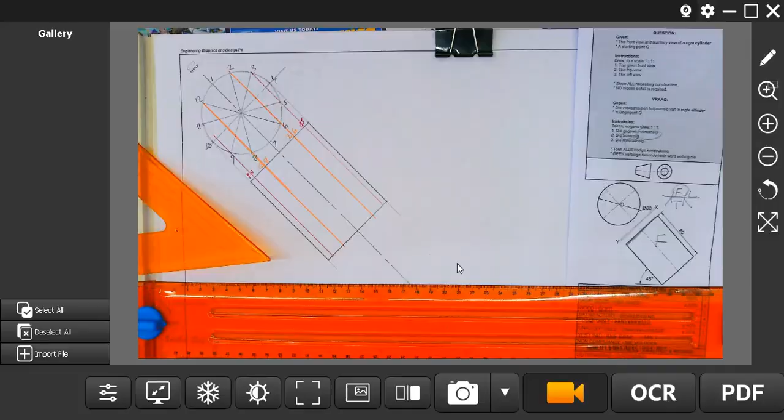But actually these videos are more for educational purposes for you guys. But I mean, it's an added bonus if it can help you to cover a few holes. Okay, so right, let's quickly look at this thing.

So I have got a front view. I have got an auxiliary view.

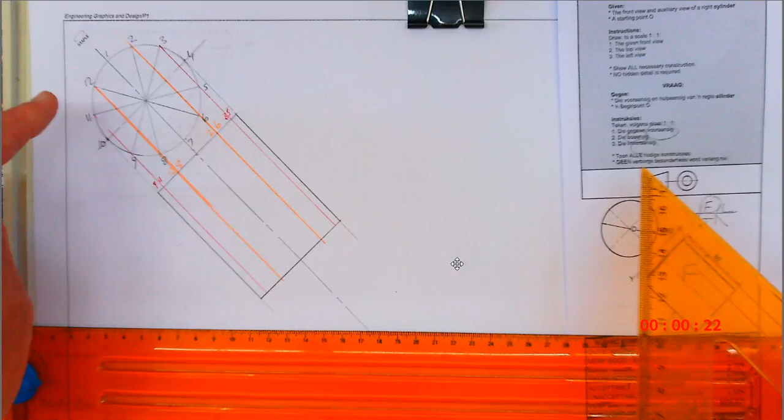This is an auxiliary view. What is this? Guys, it's very simple. If this was my pipe, then this is it. Now we're going to turn it upright. You can also use your Prit. We're going to draw this view. We're going to look from the left. We're going to draw that view there as well.

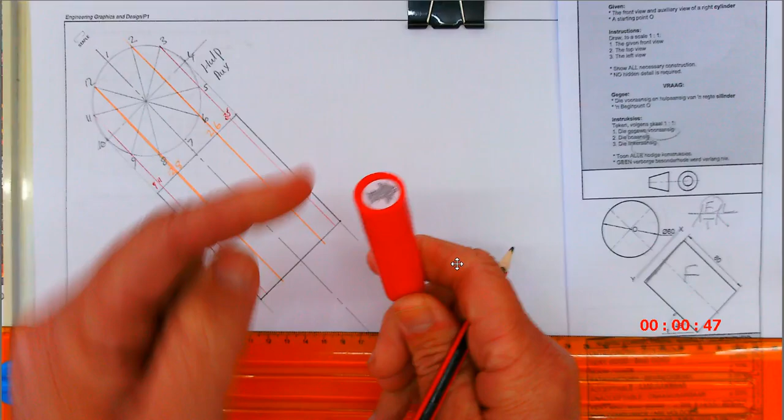Okay. So what I'm going to do is I'm going to put an XY line in between these two views. Anywhere in between them, you put an XY line at 45 degrees. There. Now, anywhere over here, we know this is a front view, so I need to put an XY line down here. Now, wherever you want to put that, over here is fine. So there, I'm going to call it X1, Y1.

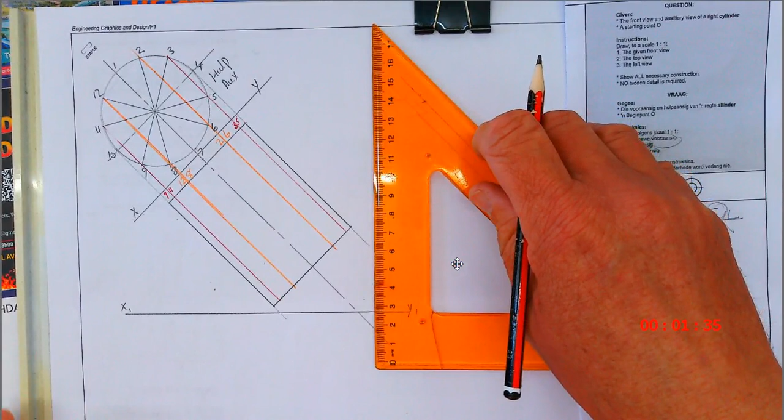Going to put another line here, and I'm also obviously going to do a top view and a left view. So I am going to move my ruler down, and I'm going to put my triangle, so that you guys can just see it. I'm going to put it over here. And I'm going to draw an XY line down here as well. I'm going to call this X2, Y2. And you can even take this a little bit further down.

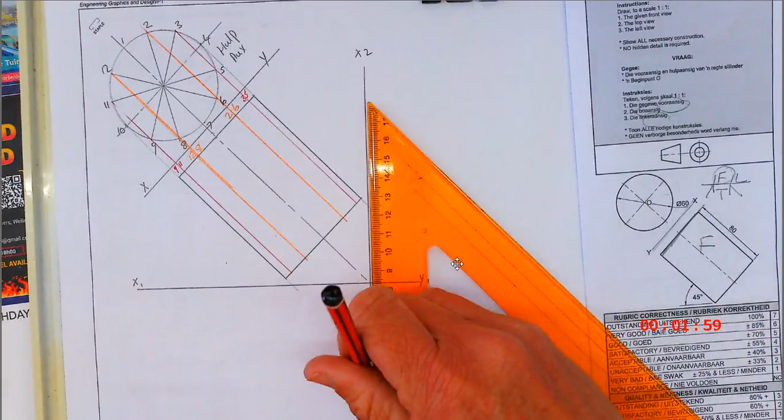As jy 'n 45 grade projeksielyn wil gebruik, if you want to use a 45 degree projection line, that would be it down here. You don't have to use it, but you can if you want to. Okay, once you guys have got this, I'm just going to cover up that part because this is a different page we are using.

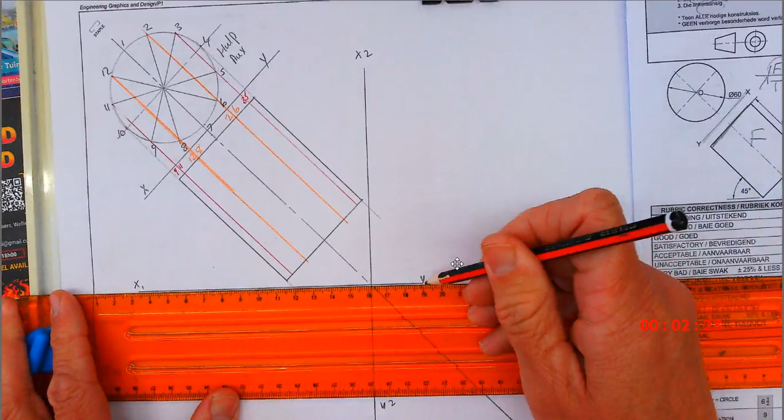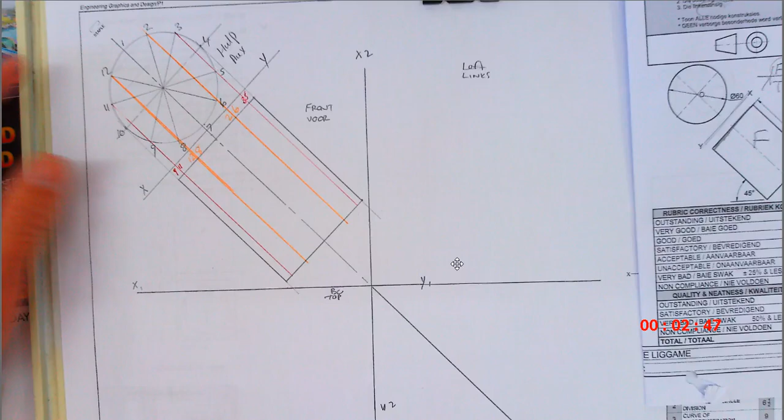So this is going to be our front view. Voor. Hierdie gaan wees ons bo-aansig. This is going to be our top view. This is going to be our left view, of ons linker aansig. Links, there's my 45 degree projection line. Okay guys, quickly, what are we going to do? Let me show you.

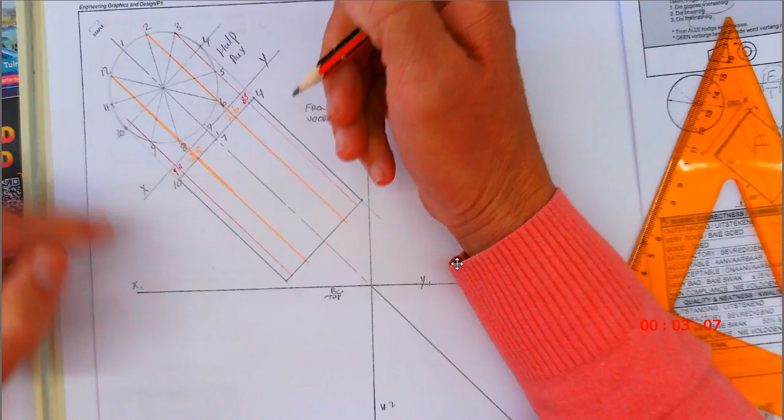Okay, you guys are going to have the top and the bottom points. I'm going to number them the same. This is 10. There's 4. The middle is 1 and 7. I'm going to have the same here, 10, 4. I'm going to have 9 and 11 on this line. I'm going to have 3 and 5 on that line. Do you guys understand why I'm using the colors?

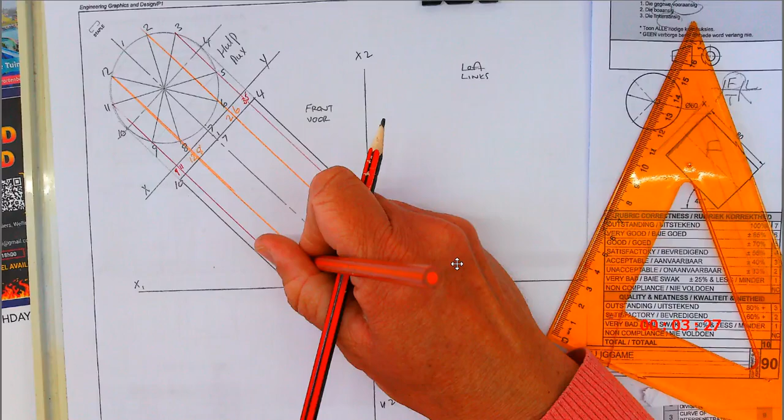Okay, het gaan dit 'n bietjie makliker maak vir jou. It's going to make it a little bit more logical. 12 en 8, 2 en 6 daarso. Wat ek nou gaan doen is, I'm simply going to go and I'm going to project these lines down. So I'm going to take this line down. I'm going to take that one down.

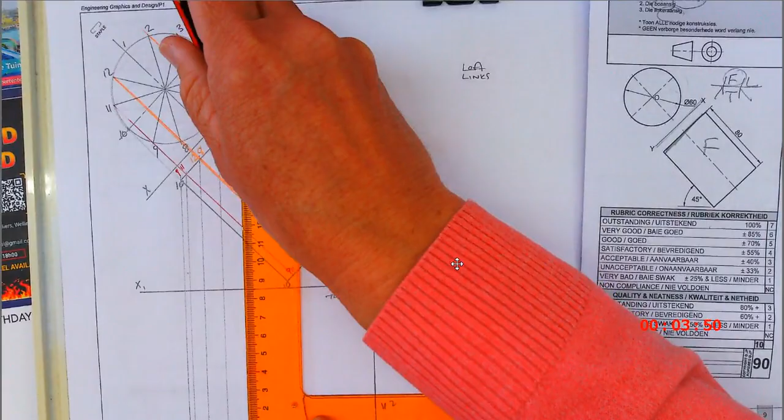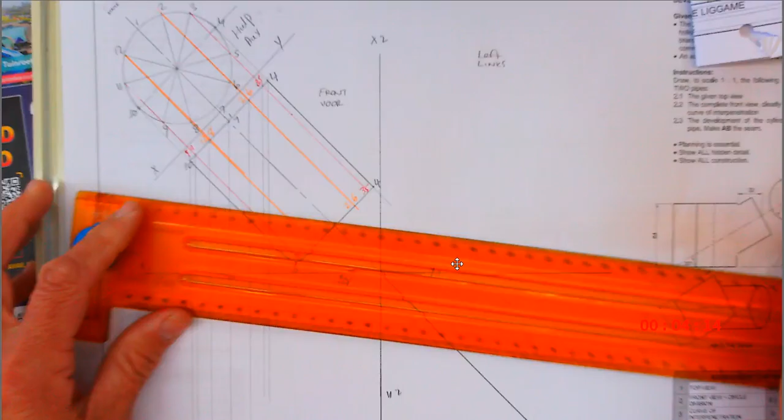And I want to give you guys a little tip that I think might be of value to you. Okay, my tip is die volgende, nee. I'm not going to do the whole thing. You can do it. Sometimes these lines overlap with those lines and then it becomes very, very confusing. So what I'm going to do is I'm just simply going to draw lines across here. I'm going to project these lines across, make sure that they are accurate.

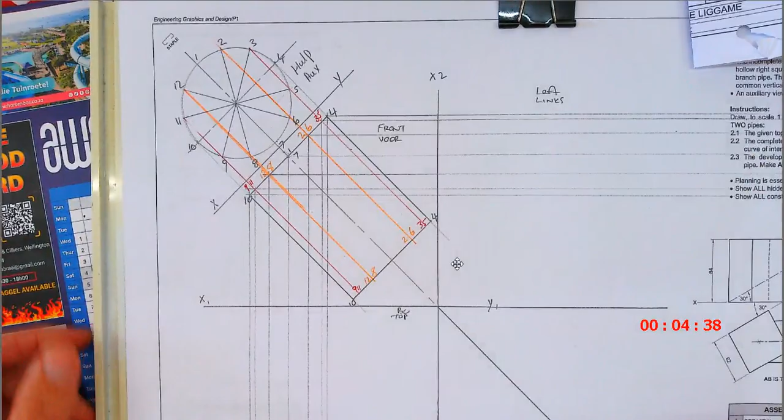Gaan hulle almal oor projekteer. I'm only doing the top. You guys will see these two are exactly the same. Okay, now it's just a case of numbering and measuring.

Okay, now can I quickly borrow that compass of yours? Thanks man, appreciate it, Matteo.

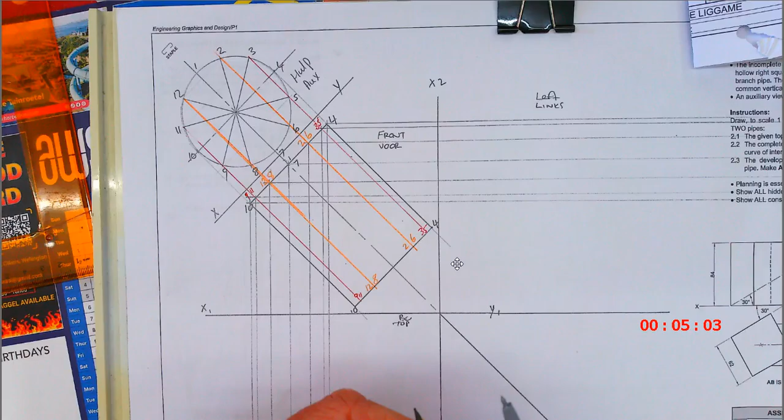Okay, so guys, what I'm simply going to do, no, it's fine. I'm going to transfer these points over. And if you guys are using a compass, make sure that it's nice and firm. Right, so what I'm going to do is, from the XY line, I'm going to measure.

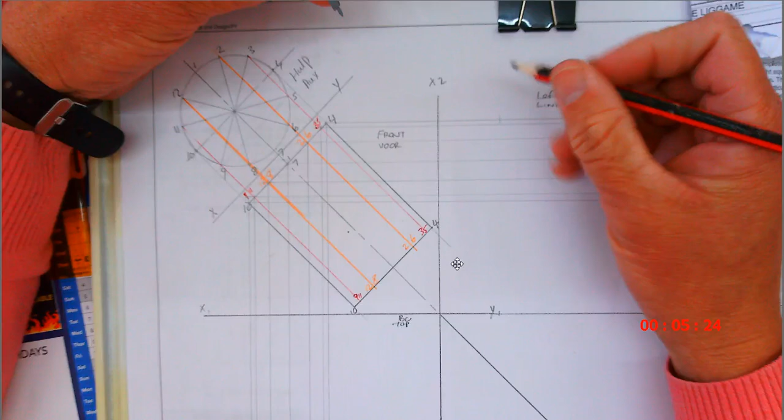There's the distance for 4. Guys, which ones are the same? 4 and 10. So I measure it once. I carry it over this 4, I carry it over to this one. As I carry it over, I number it as 4. 10 is going to be the same, so I'm just going to put it there, and I'm going to number it there as 10.

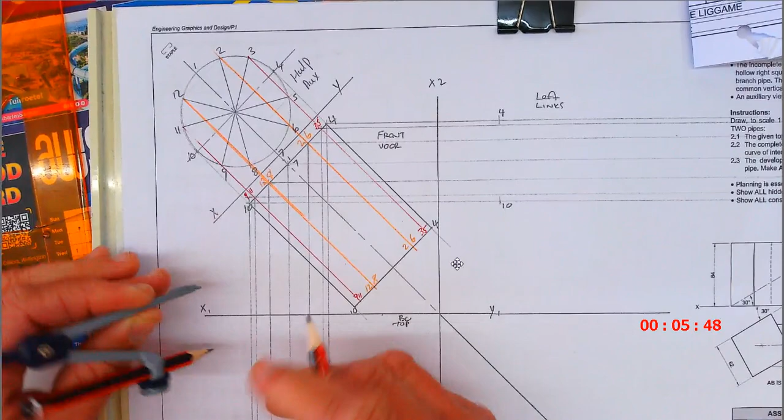Now if you guys have done it here, do the same thing here. Then it saves you some time. So there's 10, same distance. I'm going to put it there. So this is what you guys have been doing all along. So punt, grondlyn, punt, grondlyn, punt. So you measure there, kyk gou weer.

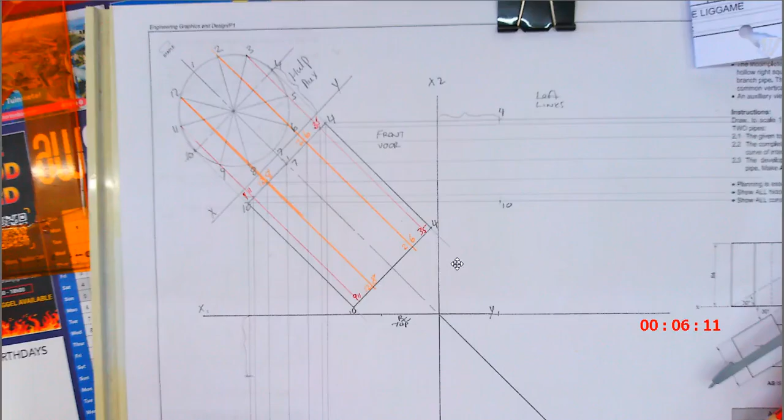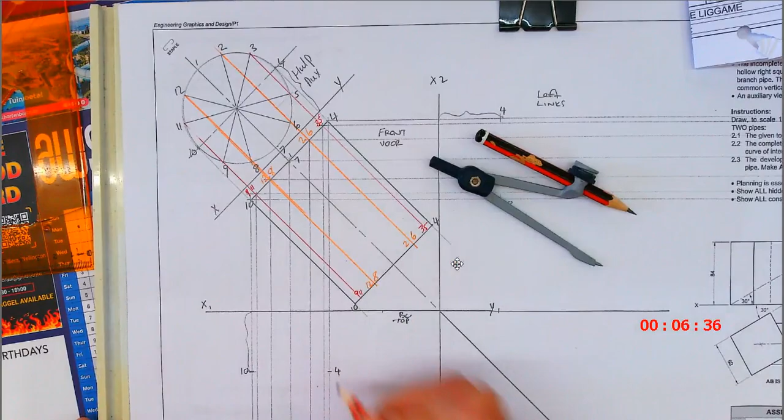Now I'm going to give you guys a shortcut. I like a shortcut sometimes. Okay? The shortcut is going to be the following. As you guys have measured 10, now 4 is the same distance. You can simply take your ruler and, if that is accurate, you just take this over and mark it there. That's going to be 4. If you guys would have projected it up, that is exactly what you would have had.

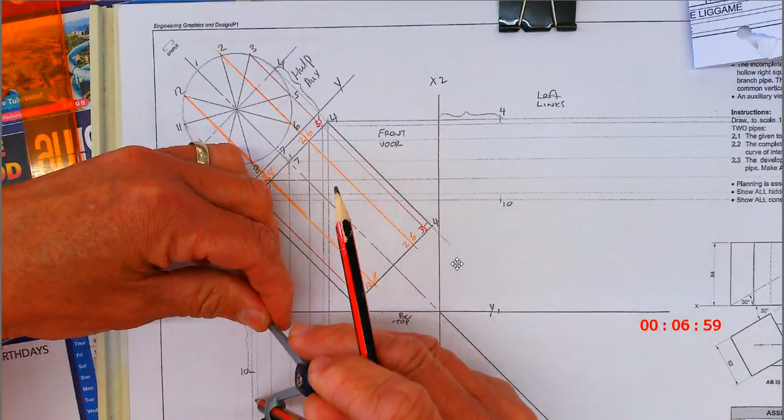Okay, so I'm going to do now the next 2 points. I'm going to take 3 and 5, the ones in red. So I'm going to take 3 and 11 actually, 3 and 11. So I go to point 11, I go down, I put it in here. I'm going to have another one on 3, on that line. So this one is 3. How do I know? That is point 3. There's point 11. I'm going to do the same thing here.

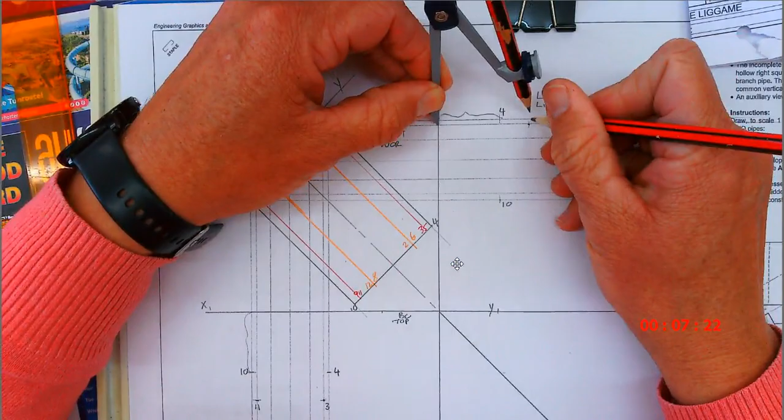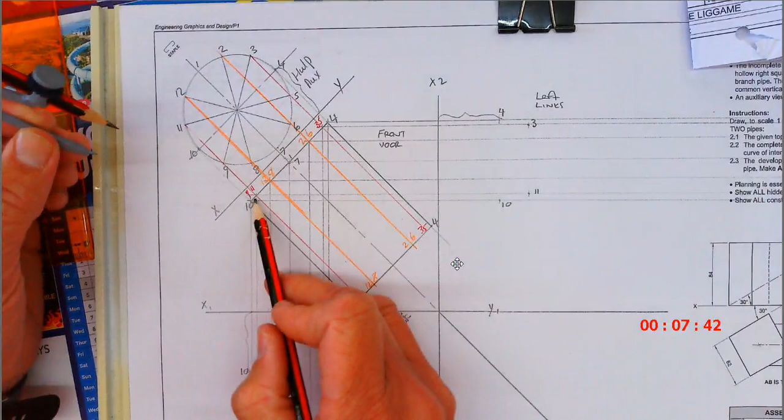And guys, now you just carry on with this until you've covered all the points. This is 3. And 11 is going to be in line with point 11 there. Okay, you guys can now just carry on with this and plot all your points. So this is going to be 11. Alright, now you're going to do 9. So 9 is going to be here. So where's point 9? There's point 9. So I just go across. Also is 9. There's point 9.

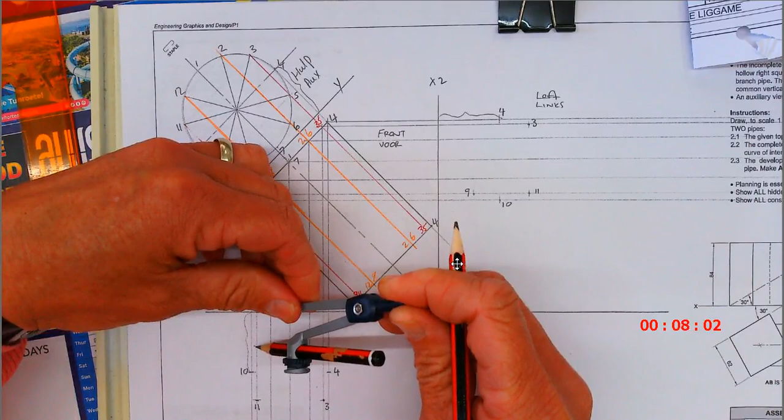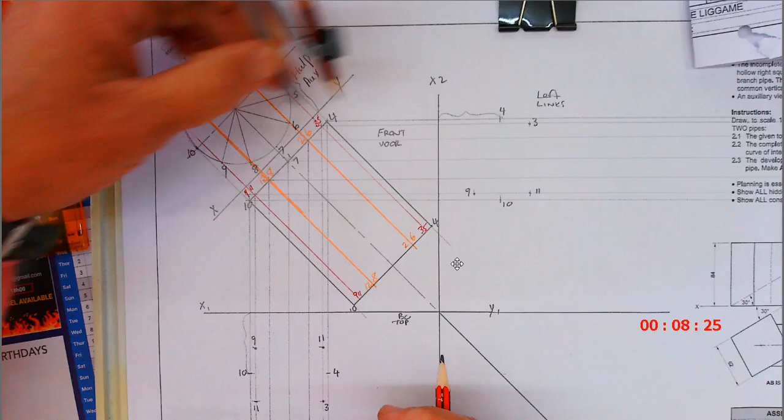If I take 9 and 11 across, okay, let's see 9. I go down, so I will have the same distance here. 9 and 11. Okay, so there's the same thing. Sorry, that's not 11, that is point 5. Sorry, that is point 5, that's point 9. Okay, so there's point 9 and point 5 is also going to be here. Okay, 9 and 5 is on the same line. I'm just going to erase that quickly. So that is point 5. Okay, right.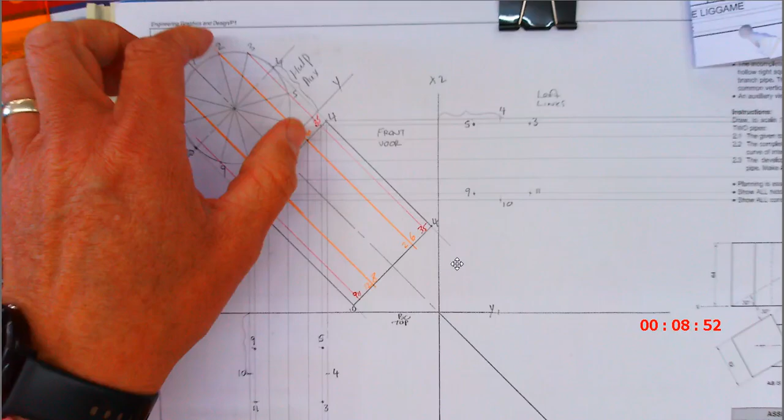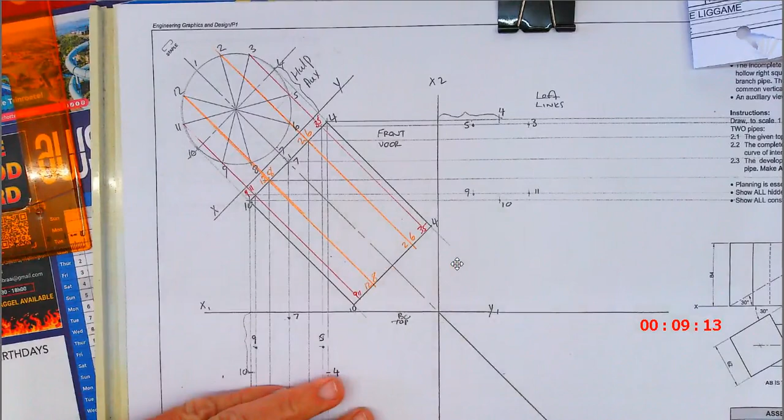So I've got 3, 4, 5, 9, 10, 11. So I still need 12 and 8. I need 2 and 6 and 1 and 7. Then I've got all these points. Okay, so I'm going to quickly measure. That one is very close. Last point 7. Point 7. If I go here, that's point 7 right there. And you will see the pattern. Okay, there's point 7.

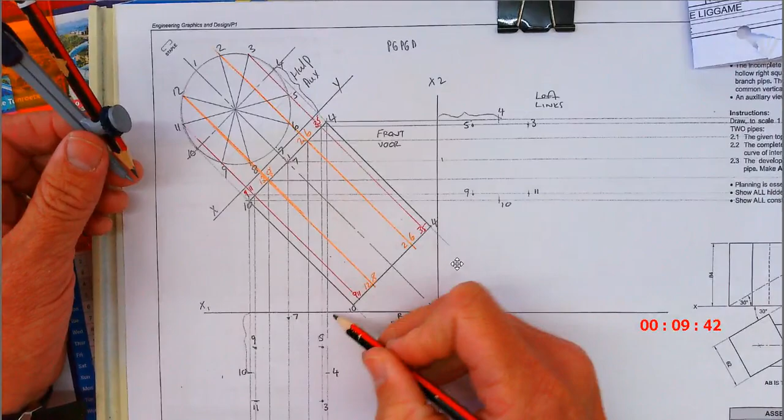Guys, what is the method? Punt, grondlyn, and punt. You measure the distances here and you put it in here and here. That's the method. So punt, grondlyn, punt, punt. What it means is if you measure 4's distance there, you can place it there and you can also place it there. Okay, and you just do that with all 12 of your points.

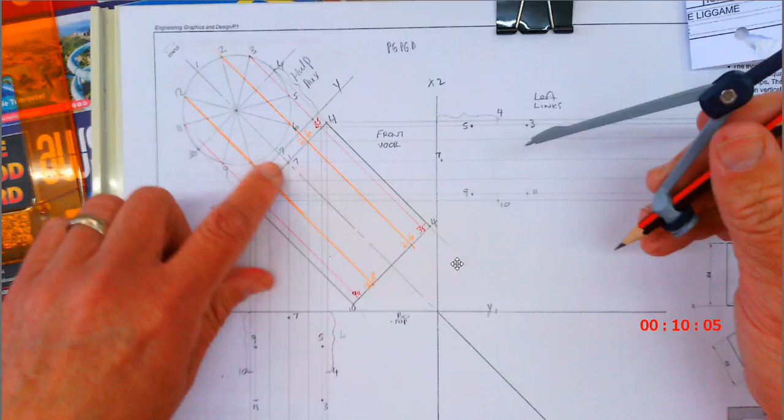Okay, that's it. Okay, I've numbered this one as 1, or rather point 7, not 1, that's point 7. There's point 7. Point 1 is a little bit further away, so we're going to measure that. Obviously, I'm going to go here. There's point 1. I'm also going to have a point 1 here.

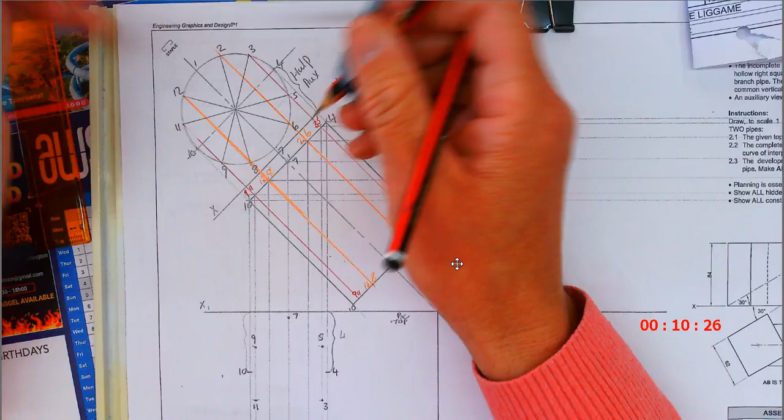Okay. And now the next part, I'm just going to do 12 and 8 now. I'm going to show you why, to save time. 12 is going to be on this line, the orange one. So that's going to be 12. I'm going to have a point 12 here as well.

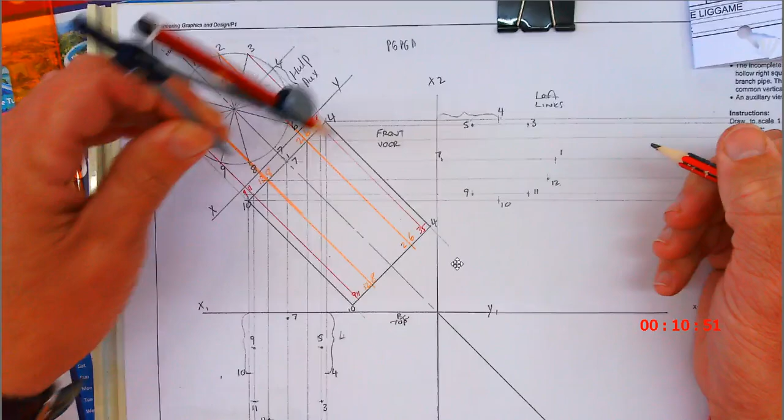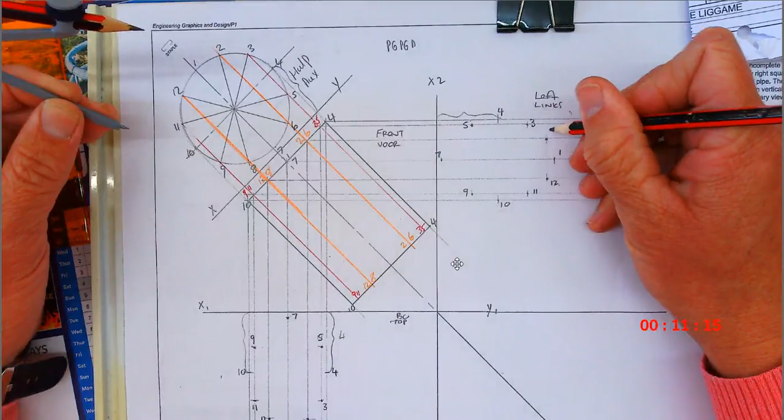I'm going to have 12 and point 2. There's point 2, same distance away. I'm going to have a point 2 across here as well. You guys see 2 and 12 is in line, 3 and 11 is in line, 4 and 10 is in line, 5 and 9 is in line, 7 and 1 is on the side.

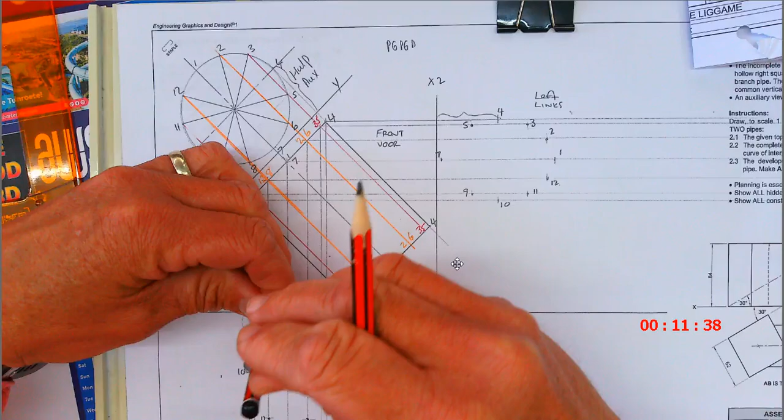Now I'm just going to put in the last 2 points, which is 9. Not 9, 8. There's point 8. Once you've got point 8, you can literally just do this. That's the same distance, 6. 6 you will see is the same distance as 8. I'm also going to put it in here.

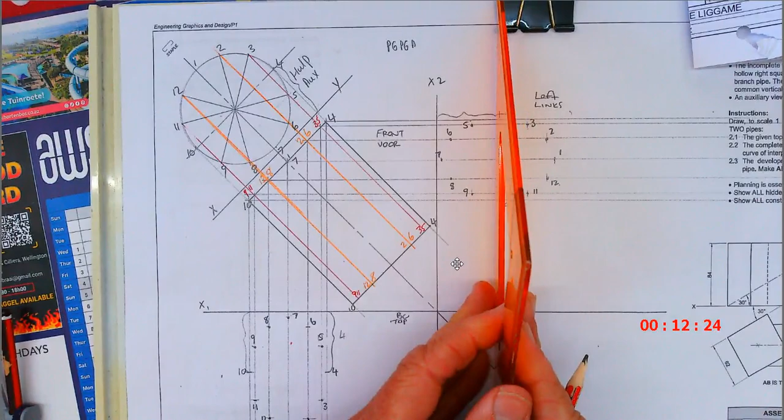So if you guys have your points here, you're going to see a spread out of 12 points here and 12 points there. If you want to check if you worked accurately, it's very simple. If I put my triangle there in the middle, the distance to that side and to this side will be exactly the same. If you do the same in the top view, you will see the same pattern, the same distance from the middle to 9 and 11, to 8 and 12, etc.

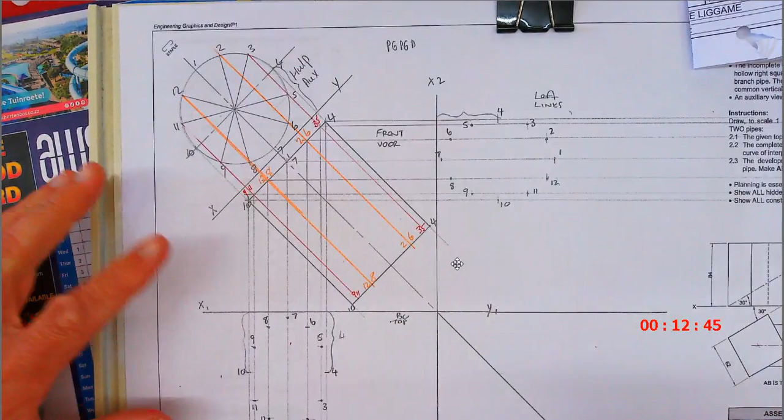You guys have it? So what I'm going to do now is put my hand on the inside and dot this out for myself first.

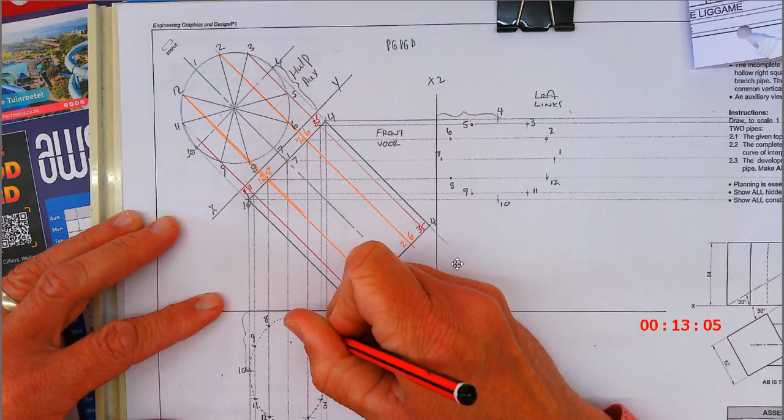Just little dots, and you keep the curve. There we go. And I'm going to do the same thing over here.

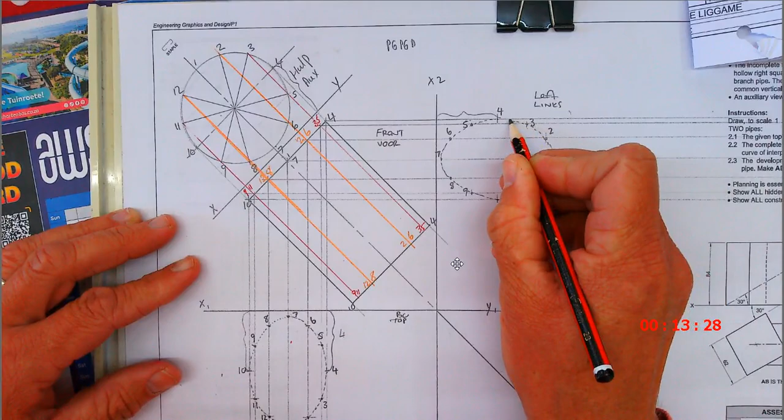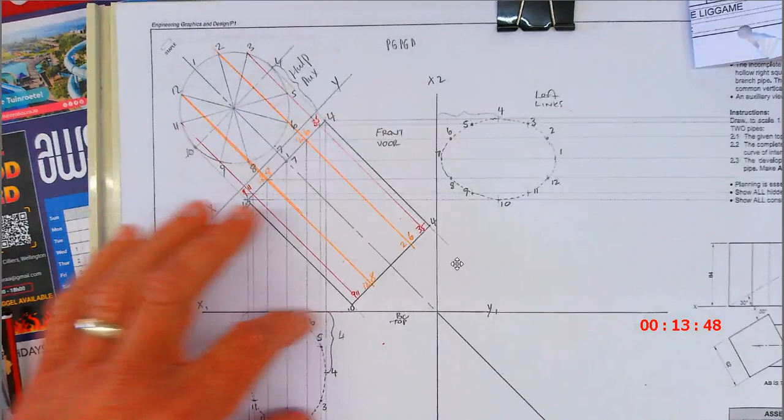Okay guys, once you've done this, you've done all the hard work. Now what's left to do? I'm going to copy these same points, just one down. We're going to copy these same points just to the right. Why? Because the same distance as you measured here to put in here, you'll also put at the bottom of the prism. I didn't do this all at once, because then it becomes confusing sometimes, so I'm just going to put in these same lines at the bottom.

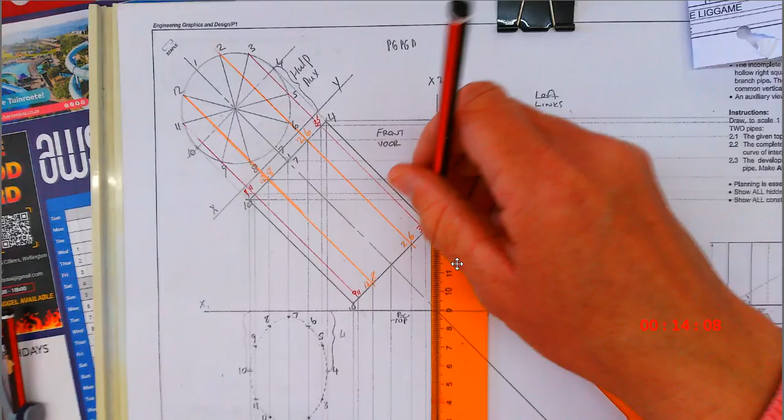Okay, I'm going to put those same lines in there. So the only thing that's different from this drawing, from the other ones you guys have done, is it's got more points. It's not more difficult, and you're working with a curve. That's all, the steps are the same.

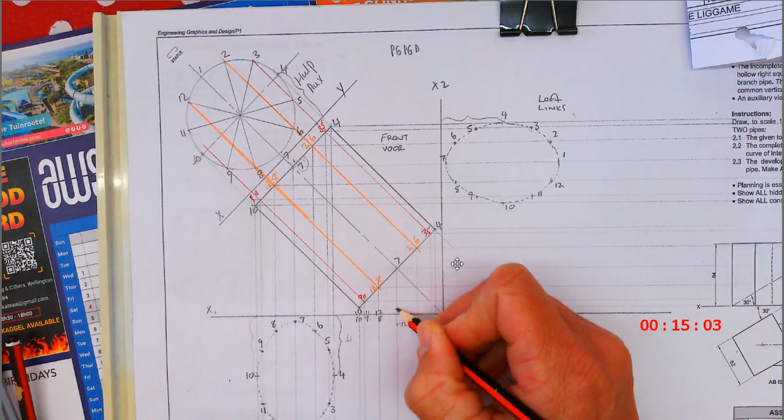So to save some time for yourself, instead of measuring with a compass everything again, what will I do? I will just go and look at the numbers. 7, so let's quickly have a look. There's point 7, so I'm going to write it here. This is going to be the first one, here is 10 on the side. So this is going to be 10, 9, 11, 12, 8, 7, 2 and 6, 3 and 5, and point 4.

Okay, so when you guys go across, you will pick up another pattern. Look here, can you see 10 and 4 is there? They're just going to move over exactly the same here. 10 and 4, can you see the distance there is the same? It's the same. You can actually measure it here, go there and plot it, but it's going to take you much longer. So just go and transfer these points over to the middle.

There's 1 and 1. There's 7 and 7. So you're saving a lot of time for yourself now. Now I'm going to take 12 and 2, and 8 and 6, and 9 and 5. And I'm going to do the same thing.

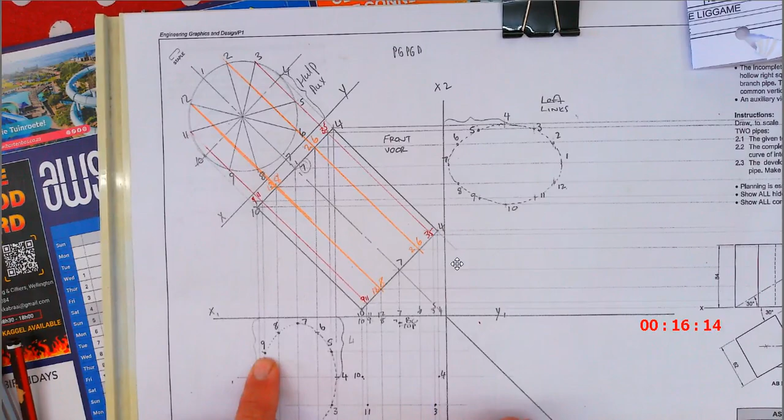Okay, so I'm going to have this point. Then 12 is there, 2 is over here. I'm going to have 11, I'm going to have 3. It's the same distances away from the side. There's 10, there's 4. Then I'm going to have 9 and 5.

I think you will pick up the pattern now. There's 8 and 6. And there's point 7. Okay, so what do I have now? I'm going to plot the same circle.

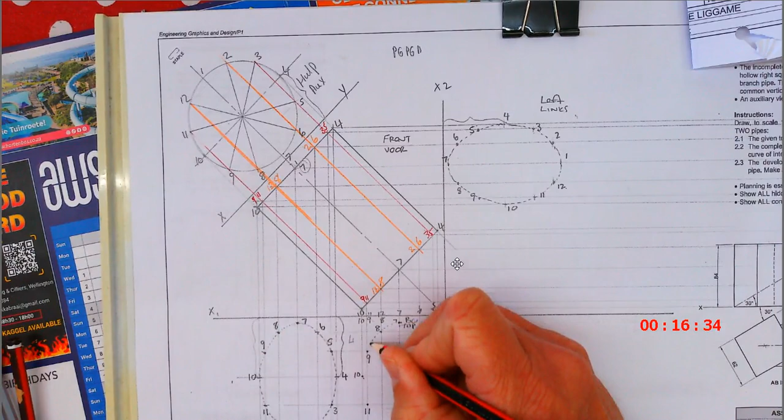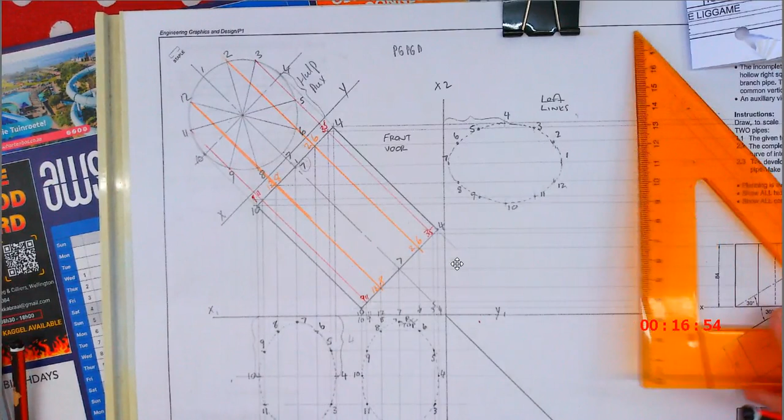Guys, these circles you're going to draw with that flexi or French curve that I had shown you yesterday. Now I'm just going to do the same thing, bringing these points down, moving down here.

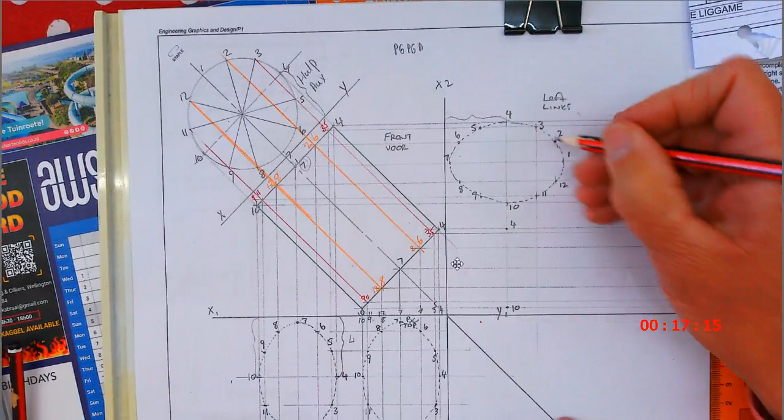So let's have a look. There's my line in the middle. At the top there's 4, at the bottom there's 10. Okay, the next two I'm going to do on this side: 3 and 11.

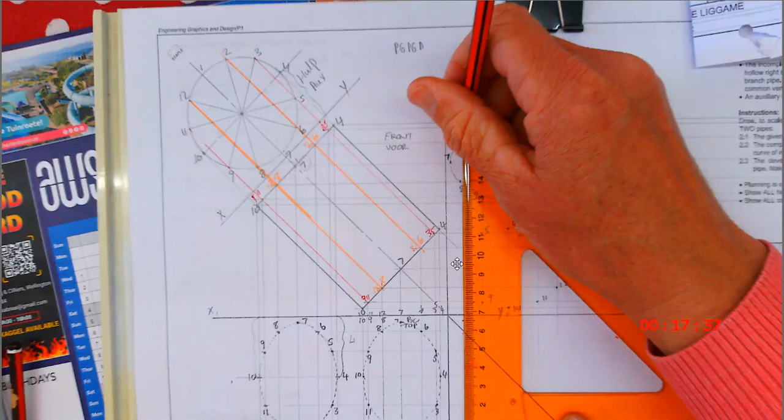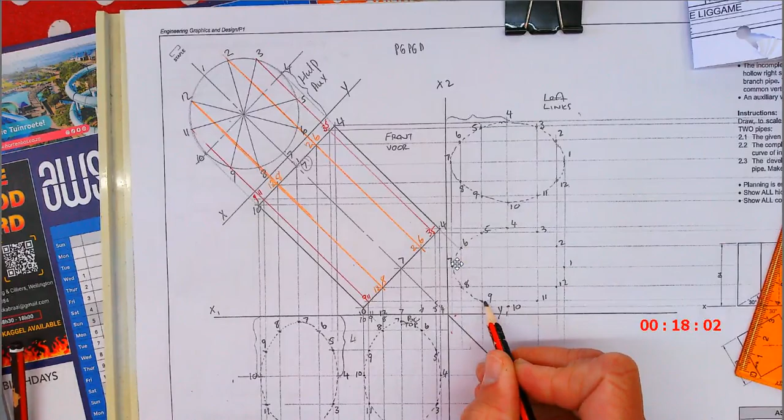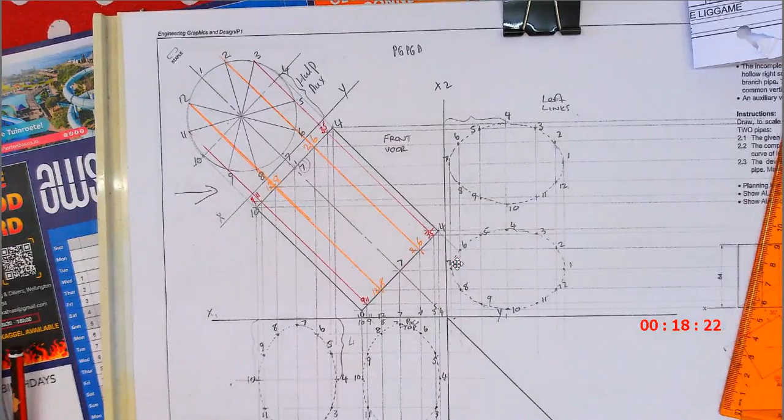Okay, now I want to ask you guys and ladies a question. If I look from this side for the left view, if this would be my object, would you see the circle? Will it be visible there? If it's turning like this in the left view, will it be visible? Will this circle be visible there or invisible? Visible, if you look from there.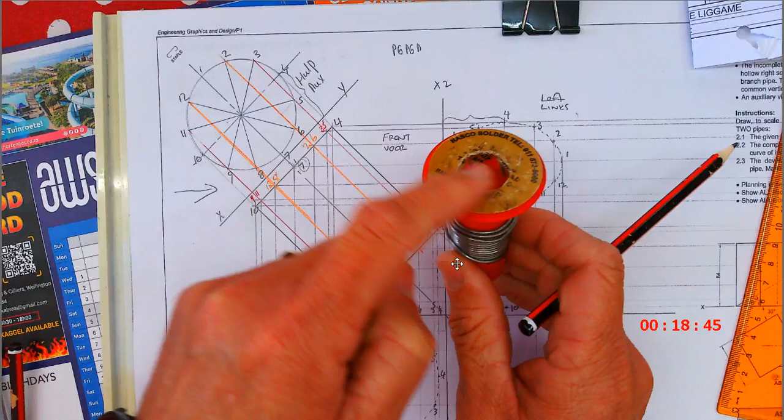Guys, can you answer me quickly? Will this be visible or invisible? Visible. Yeah, why? Because I'm looking onto that circle. I'm drawing it here, it's swiveling like this. So this circle here, you guys will take - I'm going to do it freehand now, just to save time.

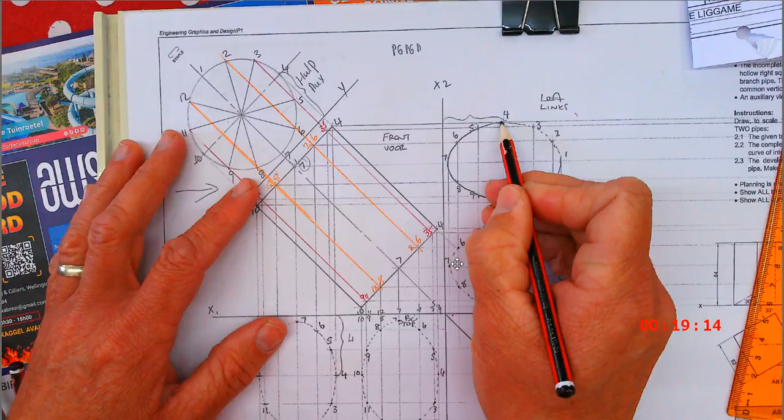But you guys please do it with a flexi and a French curve, or flexi or French curve. If you don't have one, borrow one from a friend. If you don't have friends, make friends. I'm just joking.

Okay, so it's always easier to put your hand on the inside of this thing. I'm going to do the same. Here's the question now: if I look from this side, guys, if you take your Pritt, you'll get the answer. If you take a mug, as my cup is, like so, I'm only going to see this part, and I'm going to see the bottom part of that thing, and I'm going to see the side.

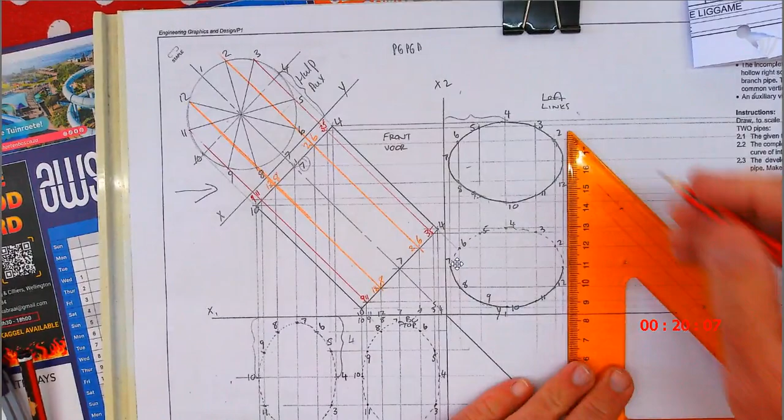Do you get it? So on this drawing, up to point 7 in the middle, down to the bottom, and up on the other side up to point 1 will be visible, and obviously the sides of the cylinder will also be visible. You just join that with a straight line.

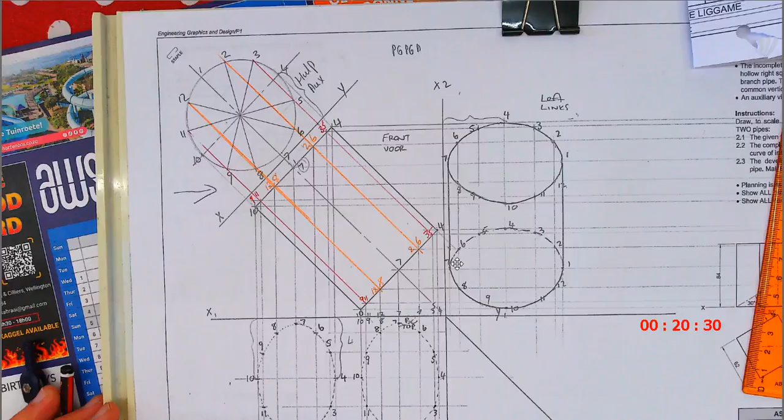Okay, so this will then be a what line? A hidden line. Okay, the top view, guys, if this is my coffee mug, looking from there, it turns - do you see, this is my mug?

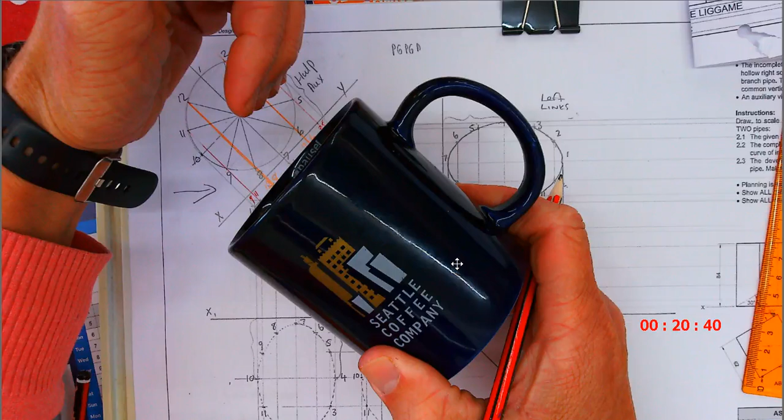I'm looking from there, guys. If you struggle with this stuff, take your Pritt or take an object that you can turn, and now it's doing this, it's going upright. So I'm going to see this shape here, it's going to see the oval. I'm going to see the sides of the mug, and I'm going to see the bottom curve, but I'm not going to see the part that's hidden there at the bottom.

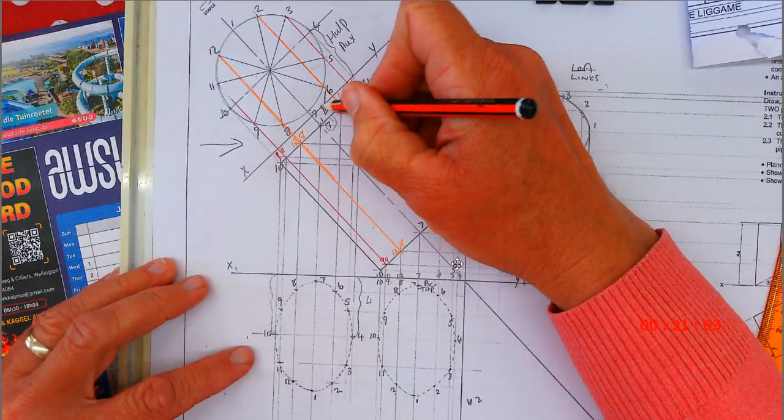So how do I know, guys? If you look from here, you're looking onto that circle, that's how I know it's visible. So this part will all be visible. Please, like I said, draw it with a French or flexi curve.

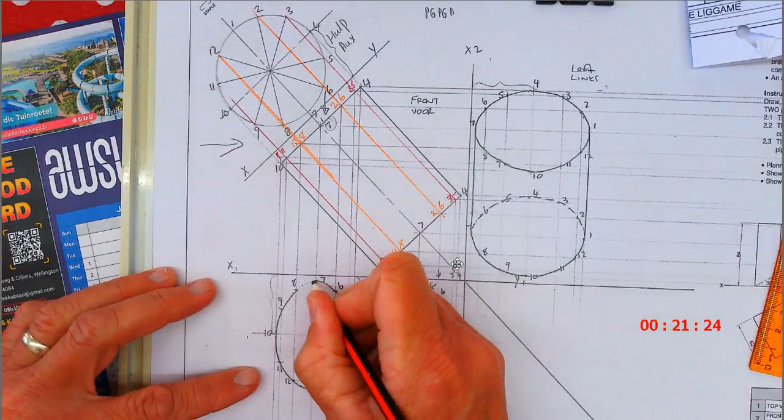I had shown you guys how to use that yesterday. Guys, you hand this in tomorrow for marks. That's why I did it with you now.